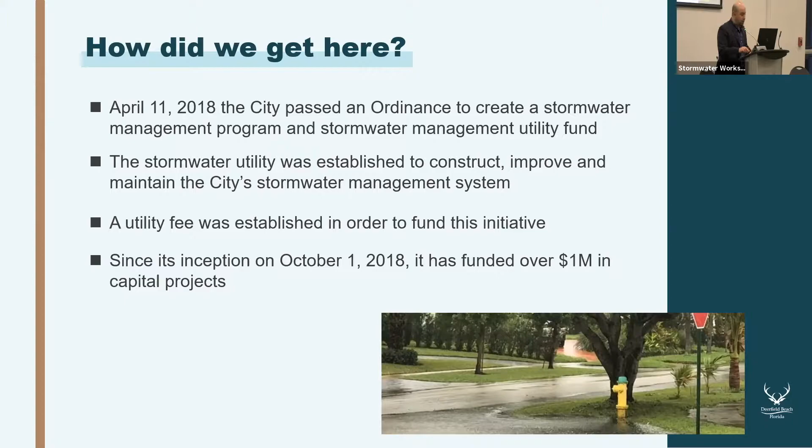This stormwater system doesn't just take the water away from the roads. We have to think about what happens to that water as it goes out to where it's eventually going to be, which is the ocean. So we need to not only collect it, but it actually needs to treat the water as well. The treatment of stormwater can be very complex and expensive. Collecting it can be a fairly simple task, but making sure all that water is treated and the water quality doesn't interrupt our beautiful community is a challenge. Again, there's the age and diminished capacity to consider.

A lot of these pipes are smaller; they were designed for a very different Deerfield than we've seen today. Public safety and health is really important, making sure that sometimes roadways do flood, but to the extent possible, we want to make sure that homes and businesses don't.

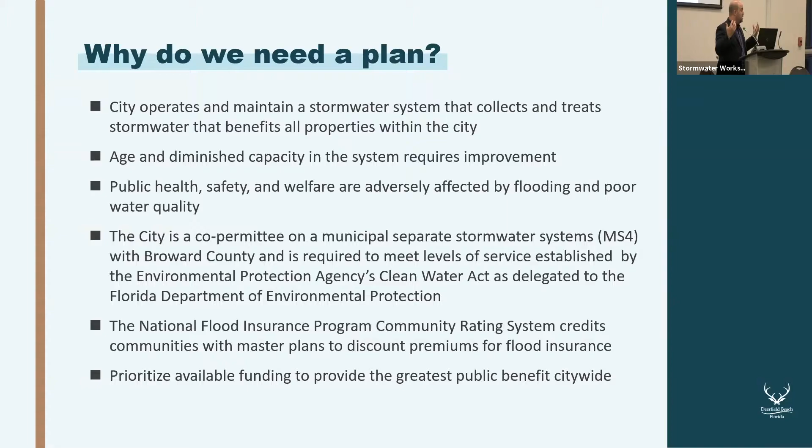The city is actually a co-permittee on what's called an MS4 permit. It's a technical term, but basically there are requirements in order to get this permit from the federal government under the Clean Water Act. There's also the National Flood Insurance Program, which you're part of through the Community Rating System, looking at ways we can reduce flood insurance by doing proactive things for the community, and ultimately thinking about how we prioritize benefits for the community.

So where are we? The utility program was established, funding personnel, equipment, materials, capital planning, and projects. This master plan was initiated in October of 2019. The initial master plan meetings were held in November of 2020 — I see some familiar faces — and the input we received there helped inform some of the decisions in terms of prioritization.

As we've noted, they received a FEMA FMA, or Flood Mitigation Assistance program. So now we're receiving the final public input, completing the plan, and starting to think about how we seek additional grant funds. The state and federal government have a lot of money available right now. This is the perfect time to be finishing a Stormwater Master Plan, and ultimately, figuring out what programs are needed.

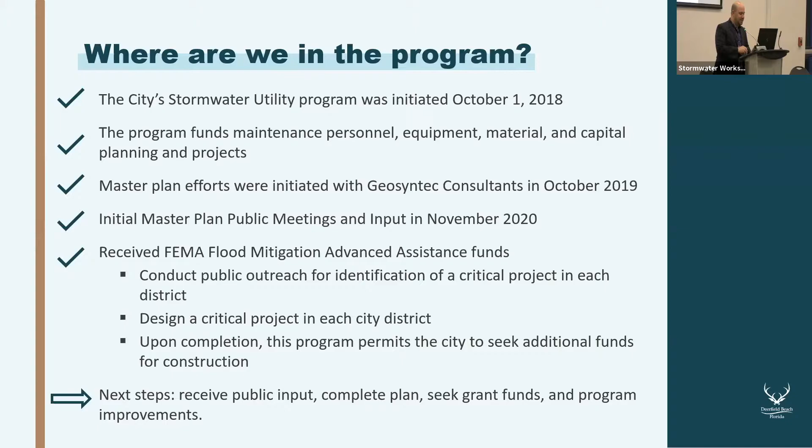So today, we're going to briefly talk about what this plan is, what the tasks are. Then we're going to go into an overview of district-specific projects for District 1. We're going to learn more about next steps, and of course we want to obtain your input. And then you have the consultants, city staff, and the commissioner here to have a conversation with you all.

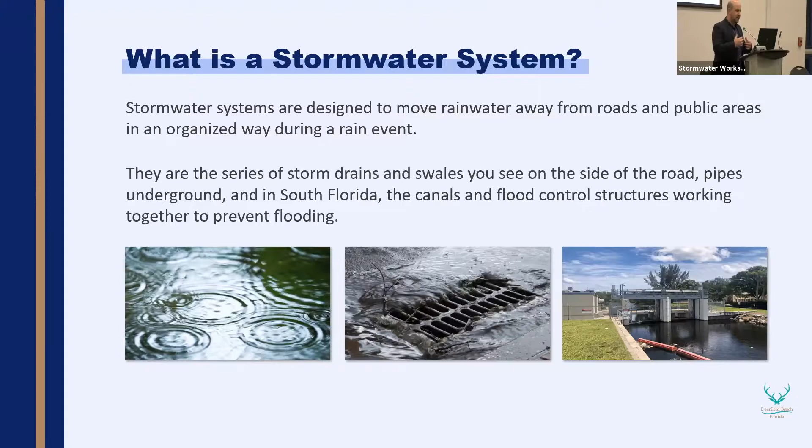So to level set, stormwater systems — we just want to level set on the definition of the Stormwater Master Plan. This is the primary system on the roadways and surrounding areas that's designed to move water from a rain event in an organized way. Ultimately, it's the series of drains and swales and even the canals that you see. A lot of the water here gets put into the ground, but you also have a sophisticated flood control system that impacts you all because the water from the west flows east. So all of the water is connected in terms of how it eventually flows out to sea.

So the goals of this project, first of all, were flood management. We wanted to make sure that this community floods as little as it can for as little time as possible — the least amount of water for the least amount of time in as many places as possible. That's ultimately the goal. We say, here are the thresholds for what's acceptable, and what do we need to do to get you to an acceptable level? The important thing is we're not going to be able to say there's never water on roads. This is Florida, we get very heavy rainstorms down here, but ultimately we want to make sure that when it does rain, that rain moves off the roadways and away from homes as quickly as possible.

And again, we talked about water quality improvements. This is kind of a co-goal with flood management. You have to think about what the water quality is as it goes out to our beautiful ocean, intercoastal, and surrounding areas.

What are the challenges we were thinking about as part of this? Well, first, sea level rise. As we noted, the water goes out to sea, and as sea levels rise, it means that gravity system — the water can't just flow out as easily. If where the water goes is covered by water, it's a lot harder to flow out. It's like putting your hand in front of a faucet for a minute — that's kind of what's happening. Once you let it go, the water can flow out to sea. So as our tides fluctuate, we have that challenge.

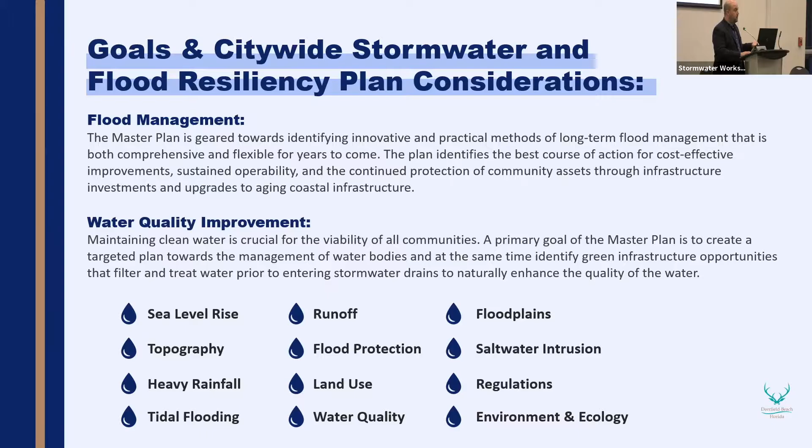So why does the city do a master plan? Well, ultimately this is the guide for the city. This says how do we spend money in a thoughtful and proactive way to reduce flooding and improve water quality as much as possible. We know we have aging coastal infrastructure, but again we want to make sure that we reduce the magnitude, the impact, and the severity of flooding to the extent possible.

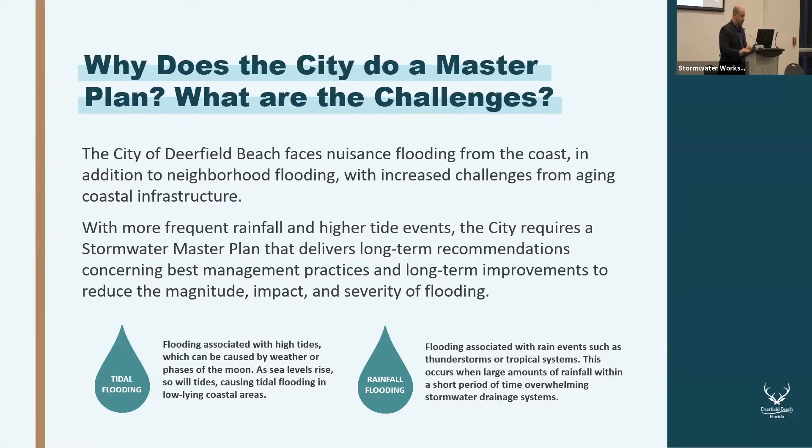And so with that, I'm going to pass it over to Mark, who's going to talk about what a stormwater master plan is and a little bit more, and go over the results of the plan.

Thank you, Alec. So we're going to shift and talk about—we talked about what it is, what's the goals. We're going to talk about the elements that make up this master plan. Again, this was an opportunity to review the entire stormwater management system, flooding, water quality, other elements, and what's going to happen, the impacts that may be coming in the future.

Look at both the inland structures, but also the coastal structures, those outfalls that go out to the intercoastal, the Hillsboro, or into the Broward Water Control District.

Now we look at effects of things that are happening right now or in the past, but also the future. If the projections of things changing in the future with sea level rise or other things come to fruition, that puts additional stress on the stormwater system. So a lot of this is taking a snapshot of what's going on now, preparing for the future, but developing strategies and programs and projects to move dirt and improve drainage that'll make the city more resilient for the future.

And that's really getting good sound data on which to base this—to base the capital improvement. We'll talk about what we recommend for projects and how much money that is. And you can see the significance of why it's important to get it right and have it on a solid foundation.

So I'm going to step through the elements in a little bit more detail and just give you a sense of the types of information that we look at and evaluate.

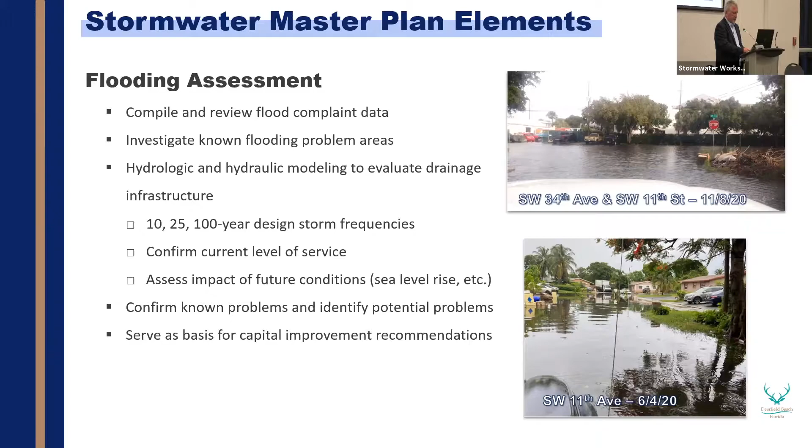We also have the opportunity to take that information and confirm the level of service of the system. By level of service, I mean these things are designed to perform to a certain storm or certain level, and we can assess how well they do that throughout the city's drainage infrastructure. So we confirm known problems, we identify potential problems, and again, to serve as the basis for capital improvement recommendations, which the 8th Avenue project we'll talk about in a little while is one of them. So there's a little bit about some of the data that we've compiled.

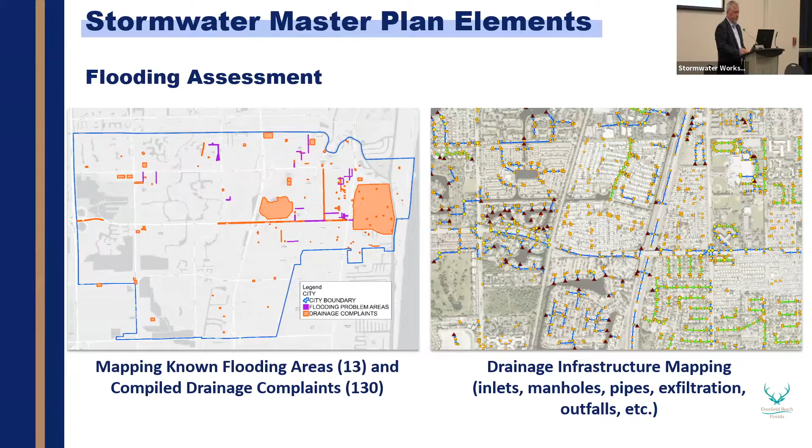We look at those, see how well they're performing, and provide a mapping like this. Now, this is a little hard to see, but there's red dots throughout the city here that indicate areas where there's a level of service deficiency.

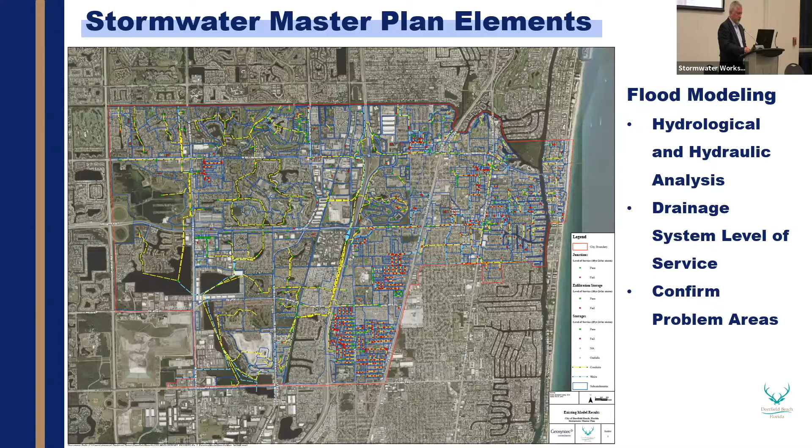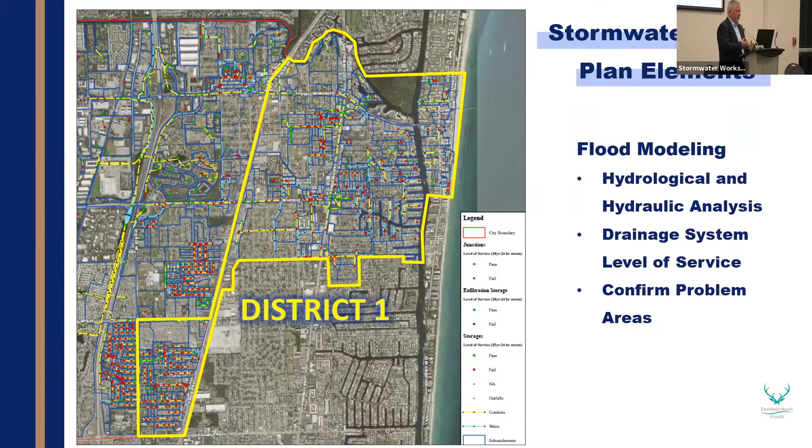Now, what we've done is zoomed in here a little bit to District 1. You can see an area that has a red dot is a system that may not be meeting its level of service. That can mean anywhere from 6 inches of water staying outside of an inlet for an hour or half an hour or so, all the way up to feet of flooding that becomes a chronic issue. But this information taken together allows us to start pinpointing areas that may be consolidated for improvement.

Now, flooding is one key component, but as Alec mentioned, water quality assessment is another one. There are some regulations on the books now, but mostly coming, that will affect the need for the city to manage water quality of stormwater to a higher degree. As stormwater hits the ground, it picks up various pollutants, metals, oils, nutrients from the ground, and then washes those into the drainage system.

Now, you see a lot throughout the city ways that it's being treated already, as stormwater ponds. You see those in most new developments, and those are mechanisms which can treat stormwater and take out some of the pollutants before it makes its way to the receiving water, the intercoastal or Hillsboro, or south to the Broward Control District. So that's going to be important looking forward, to be able to look at hotspots, or areas of the city where there might be excessive or higher pollutant loadings, and be able to program projects and ideas for fixes moving forward in the future.

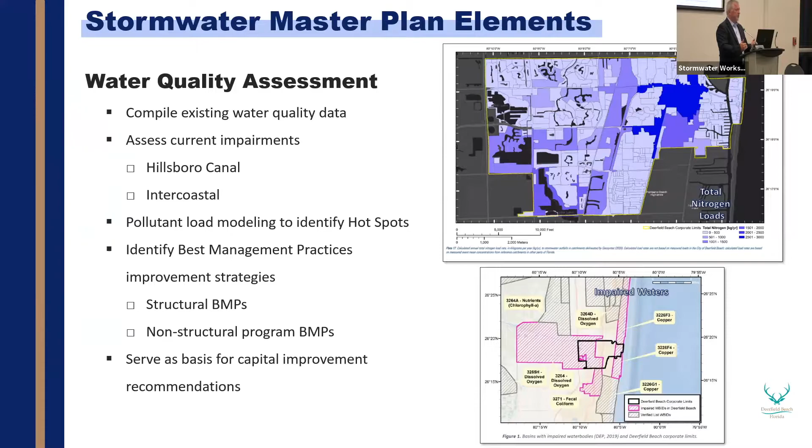So in addition to flooding, water quality serves another element of identifying projects and programs for moving forward.

We did a coastal resources assessment. This was focused primarily on the various outfalls throughout the city, and we did a conditions assessment from the boat, looking at whether these things are working well. There's some example pictures here of what I would consider a good looking outfall, one kind of medium, and one that's in kind of disrepair. It's important that these function correctly because the water is trying to get through them out to the coast. So we looked at which ones may need to be addressed.

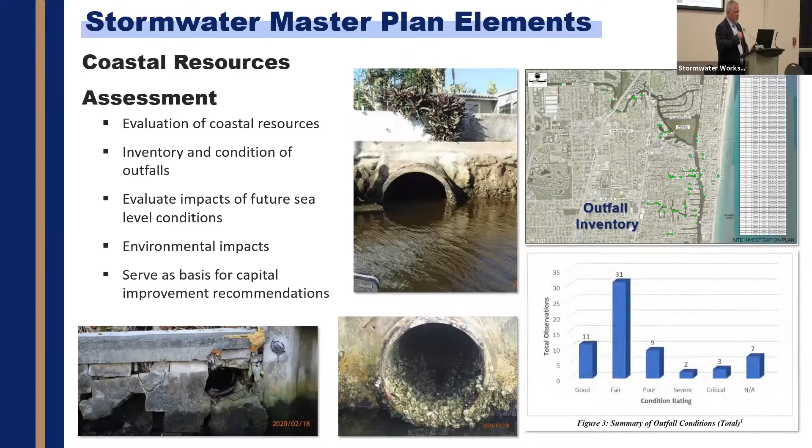Again, that would fall into a capital project improvement that may need to be programmed for the future of the master plan. Now, one of the challenges with outfalls is the city does not always have the right of way or an easement where the outfall is. Some go through private property, so there's an additional challenge if there's problems with those going through private property. There's efforts to secure the rights to be able to do some of the improvements, and that's particularly a challenge if there's a lot of public or private area trying to drain through those points. So again, this is another key element of the master plan.

Now, another couple areas we look into, the first one is a regulatory compliance review. Alec and Priscilla referred to some of the regulatory requirements given by the state or local authorities to manage stormwater. One of them is the NPDES permit, a federal permit delegated through the state of Florida to manage your stormwater program. It's not only to make sure you know what your stormwater management system is, but that you're maintaining and operating it properly, and there's metrics and requirements for doing that.

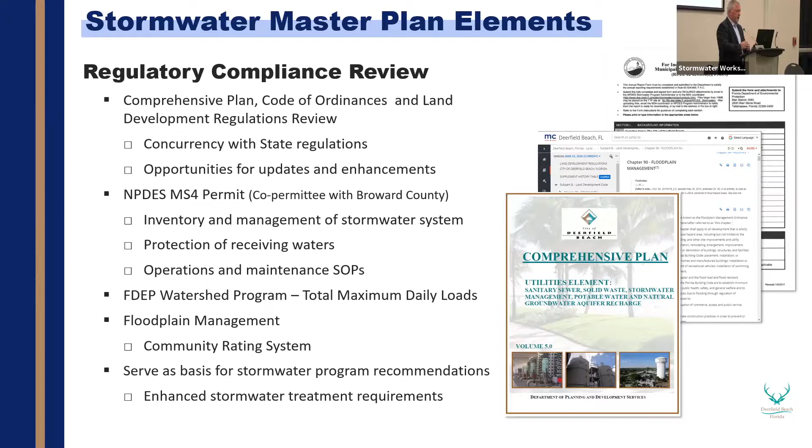Also, there's an opportunity to look at local code, the comprehensive plan code and ordinances, land development code, and look for opportunities for enhancements the city can consider to manage stormwater better moving forward. There's a floodplain management system, the community ratings system, which was mentioned before and is very important. It's the mechanism by which flood insurance discounts can be provided to citizens, and doing this master plan is an important factor that can be considered in getting lower insurance rates. Again, these turn into less projects that turn dirt, but recommendations for enhancing the program.

Likewise, one of the last big elements we look at is the operations and maintenance review. You saw how much drainage infrastructure is out there, and Priscilla and her staff are challenged with maintaining that, making sure it operates and having the resources, both personnel and equipment, to do that. Their staff and operations pays for the employees, the equipment, the street sweepers you may or may not see since they tend to go out at night. Here's a little table that gives you a sense there's nearly 3,000 inlets and over 45,000 feet of exfiltration system pipe that's part of the city system they have to maintain. So significant action, and recommendations for how the city may enhance their program of operating and maintaining the system are also included.

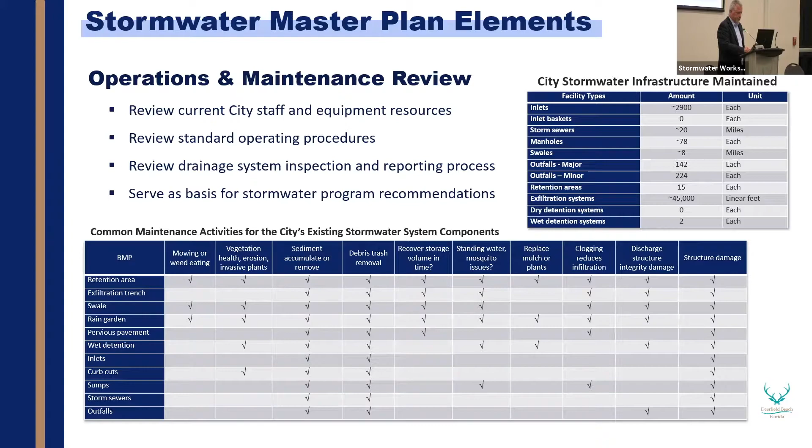So that covers those main elements. There are some other minor elements, but what it culminates in is what we call capital project recommendations. This is kind of the take home of the master plan, pulling all the different elements we looked at together and recommending what needs to happen moving forward, and putting a price tag as part of the plan to understand how much things are going to cost. Then the city has an opportunity to start looking for funding for that. So this is what we have right now as far as our CIP listing.

What it has broken down is a number of flooding projects, some that can go direct to a design level, for example 8th Avenue. There are some flooding studies, areas that indicated some problems that may be occurring and may warrant looking into a little bit deeper before they get to an actual construction project. There are some water quality projects, also some coastal resources projects, for example looking at repairing some of those critical outfall deficiencies, all put together to provide a recommendation moving forward for a CIP.

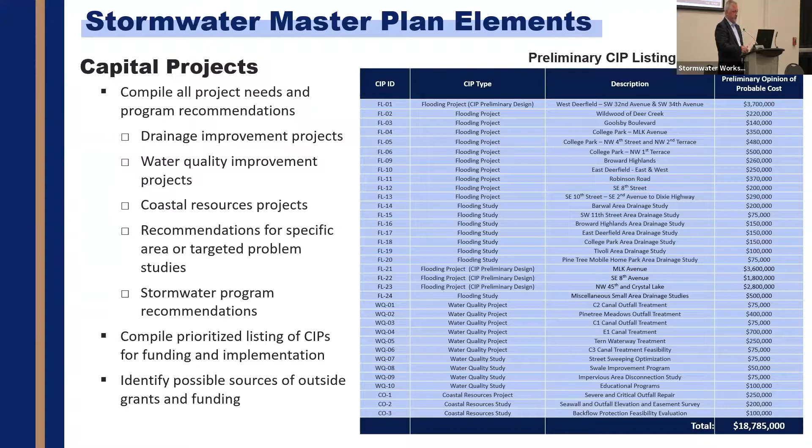Now, as you can see, the text is a little small, but if you can see on the bottom right, this totals over $18 million. So this is not an insignificant amount of money to address a lot of these problems moving forward. Now, as part of the capital project, the table is hard to see where these actually are occurring.

So we provided this map that has dots showing where these major capital projects are located. The blue ones are flooding related projects and the green dots are water quality related projects. As you can see, they're fairly well spread out throughout the city, and in fact, as you'd expect, many of the water quality ones are situated close to where outfalls are going to the Hillsboro or intercoastal. How that table on the previous slide breaks down per commission district is shown on the right. There's a breakdown by district, but there's also some project recommendations that are actually a citywide benefit, so we total those separately.

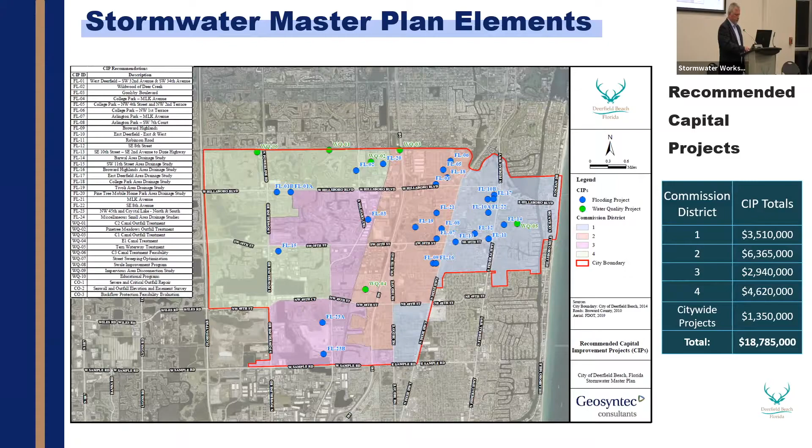Now, the other benefit is the city can look at where money and expenditures may be prioritized. Having this established in a 10-year program also helps to look for external funding that may be available out there to help supplement the city's funds.

To give you a sense of budget, for the stormwater utility, about $2 million a year was brought in, but currently only about $400,000 a year can be earmarked for capital projects. So over this 10-year period, there's significant ground to cover to get funding to address these needs. But having this plan allows the city to move forward in a smart manner and look for ways to make a better program.

Now, I'm going to shift gears a little bit. As was mentioned, the city got some funding from FEMA, Flood Mitigation Grant funding, to advance 4 key project areas in the city to the next level. The master plan identifies projects and sets the plan in motion, but design and implementation happen after. This funding helped to advance 4 areas to a 30% preliminary design. That's essentially coming up with a solution that's appropriate for the particular areas.

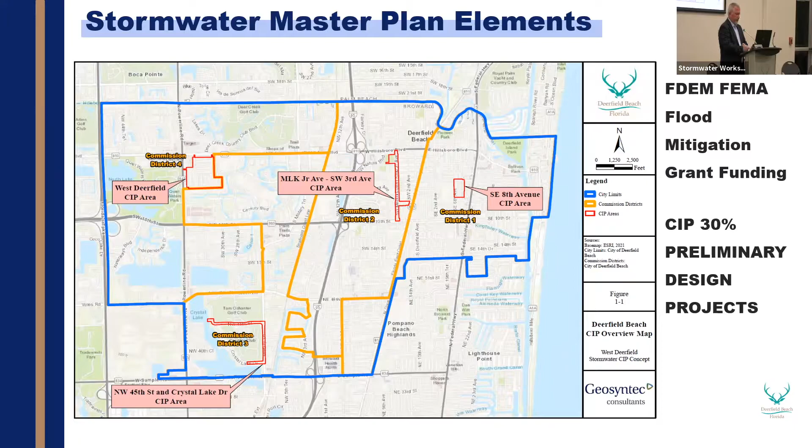Now, the 4 areas here are shown by district. The one of focus here tonight with Commission District 1 is Southeast 8th Avenue. That is being advanced beyond the rest of the projects in the master plan based on that external funding; the city was very fortunate.

Some of the concepts the city had looked at in the past were: can you just make the outfall pipe bigger? As you can imagine, that is quite a constraint for this long outfall path, and there are already very large pipes near the outfall. There are things like injection wells or pump stations, but these have issues with acquisition of right of way and tend to be cost prohibitive.

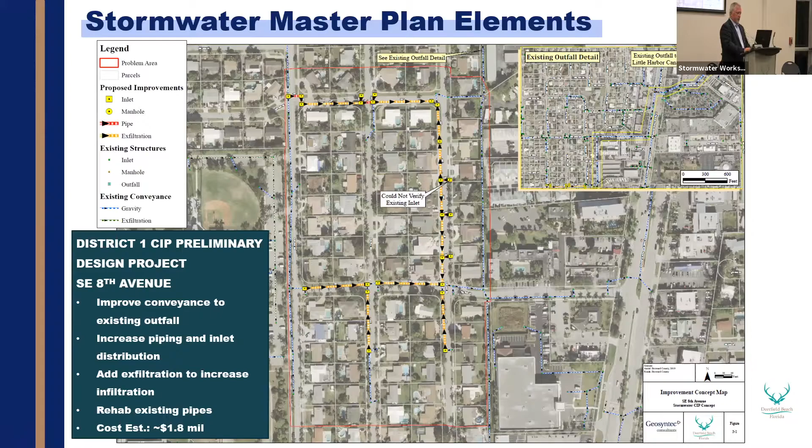And as you can see, there's an obvious, what we term a bowl right along 8th Avenue. This just sits lower than the surrounding area, which again contributes to the fact that that's some of the worst flooding. Some of the areas on the periphery are also low, but there's some other areas that are quite a bit higher. So the challenge here is that bowl. That's the place that wants to fill up and then wait its turn to get out the outfall and out to the northeast.

So what we've come up with as an alternative is the idea, well, if we can minimize what gets to that bowl, if we can spread out the drainage throughout the subdivision more, then that lessens the impact right in that area. So we proposed more pipes, more inlets along some of the streets, kind of looping them, connecting them together, providing some exfiltration pipes, which is some infiltration pipes, to be able to kind of take the edge off some of the flow that wants to get to the bowl.

But be able to drain it, manage it better earlier on to spread out the timing of the flow so that, as it's waiting to go out the outfall, it causes less impact, and in many cases, hopefully significantly reduces the instance of flooding. So that's the concept as we have it right now, and as it's mentioned on the bottom of the slide, the current estimate is just under $2 million for that improvement.

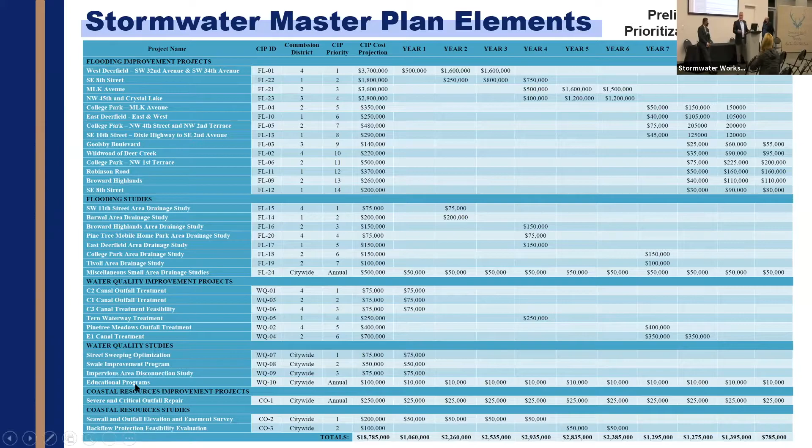Yeah, a few things. When you're talking about education and educating the public, that's actually a requirement of that NPDES permit that comes out from the state to the city. There's elements of best management practices that the city has to engage that involve education. And in fact, I apologize, going back here, if you can squint a little bit, right down in here, we have an annual allotment for educational programs to help with that exact issue of trying to get the word out and get folks smart.

Florida-friendly landscaping is a big thing. So there's that. But there's also, when you mention bioswales and rain gardens and green infrastructure, those are effective ways to manage stormwater. So as part of the regulatory review of the city code and comp plan, those are some of the elements we look at. Those are becoming more popular as effective ways to help take the edge off of stormwater management. And so there's recommendations to look into the code, make sure there's not anything that inhibits the application of those types of technologies as they come through.

And even you mentioned swales. One of the studies that we did identify, and again, it's kind of down on the list here, is a swale improvement program. And I've lived in Florida all my life, and one of the challenges is there's old Florida and there's new Florida. Old Florida was no curb and gutter. It was ditches and swales, and you expected some water to be in them a little bit, for a reasonable amount of time.

But what happens a lot is even in some of the subdivisions where swales used to be in the front yards, over time it accumulates from mowing lawns, not from any direct practice, but they kind of fill in over 15, 20 years. And a lot of the areas, that's where trees are planted because it looks nice.

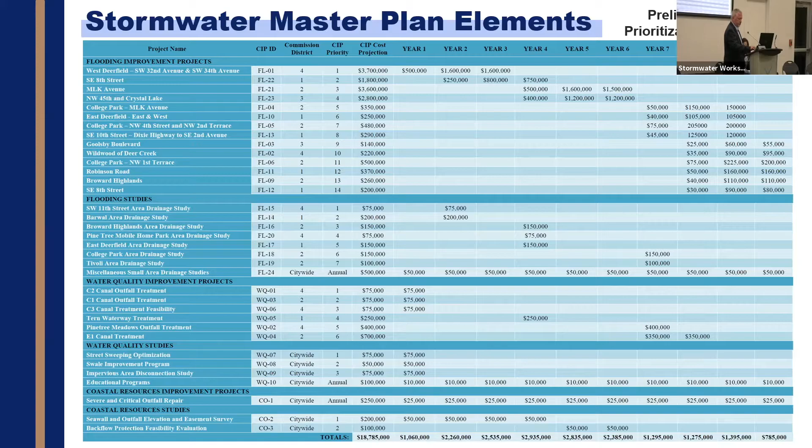Thank you again for your time, and this is a great resource. I recently moved to the Cove. My address is 458 Southeast 17th Terrace, and I moved here about over a year ago. I noticed that whenever it rains, all of the flooding from the street comes down into my driveway and literally floods inside my garage.

I looked around to see where the closest storm drain is, and it's maybe about 5 or 6 houses down the street. So there's only one small storm drain on my entire street, all the way on the end. I wanted to see if there's a way to get another storm drain, to request the city take a good look at my street specifically, Southeast 17th Terrace, to try to put another storm drain somewhere on this side of the street to stop that from happening.

We'll definitely evaluate it. We'll have to get your address again and take a look at the area to see where the low points are and where the water wants to go. But these kinds of concerns, we take down the addresses and add them to our list of complaints, so we can programmatically work these into the overall scheme. That's the whole purpose of the master plan, to take on all of these concerns in these areas and prioritize based on the greatest public benefit. We'll definitely add your concern to the list of flooding areas, so we can look into ways to mitigate it.

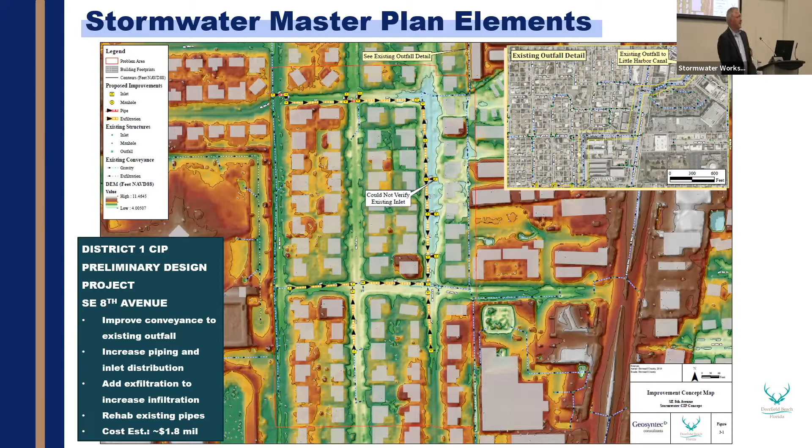Thank you. If there's any way to incentivize, and I know education is part of the program you laid out, but if there's less water draining off the little green space we have, if it's more retained, the consequence is going to be less stormwater in the streets. So if there's any way to do more of a marketing campaign or social sensitization of the public, like plant more trees, reduce fertilizers, and maybe rain barrel collection, something about redirecting water off their driveways just to keep it on their property. More trees, more something that collects it. Composting and mulching have been shown to retain a lot more water on property, so it doesn't just flush out into the street.

Anyway, so that's it. I think any incentive would get the people involved more, instead of just expecting the institution to do something about it.

Yeah, thanks, I'm gonna pipe in here. I've been in Florida most of my life, I'm Jeff Marshall, I live on Fifth Avenue on the other side of Hillsboro from you guys. We get 60 inches of rain a year. This year we've had 26 so far, so we're short by almost 15 to 20 inches. It's been really dry. Nobody's seen water here for a number of years if you haven't been here.

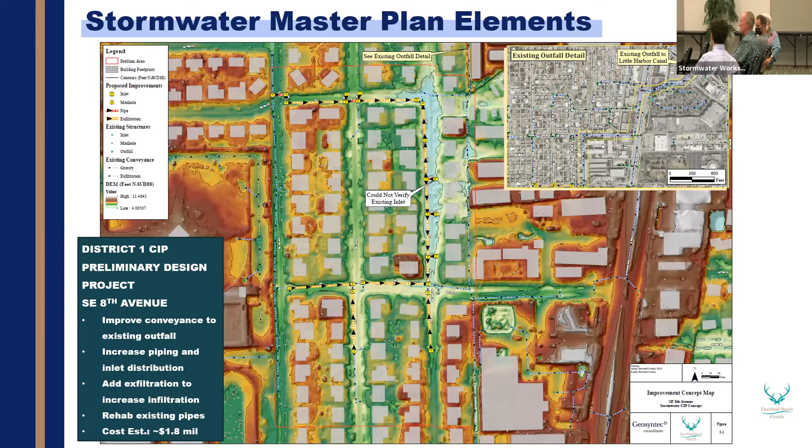I said, swale the water in the middle and the sides, you probably don't even need irrigation. But no, we've got to go to four lanes, but we're going to put curbs. And now where does the water go? It's got to go into the storm drain system. I hate to say it, but unless that attitude changes, what are you going to do?

It's everywhere, everywhere. The planned communities are even worse with all that stuff. Downtown Deerfield, we're not a planned community - this stuff was planned 50, 60, 70 years ago, and even then it doesn't count, so I have to figure out a way to get rid of the water. But the big problem for 8th Avenue is it's not going to get fixed unless you do something big.

So, thank you. Okay, appreciate that.